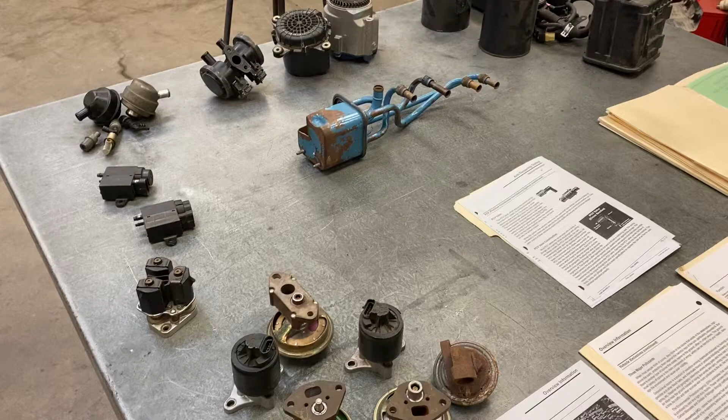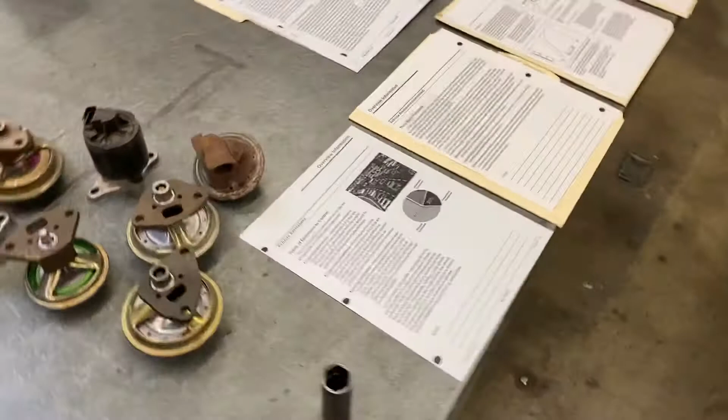Okay, we're going to take a look at emission control components and different systems that were used to control different pollutants coming out of the vehicle. So today we're just going to give you an overview of different components and how they work, brief description.

So we're going to take a look at some of the different emission components that came out. The first one, there was something called the Clean Air Act, way back in the 1960s, when the government started dictating to manufacturers that they have to lower emissions coming out of the vehicle. The first thing they focused on was where emissions are coming from on the vehicle.

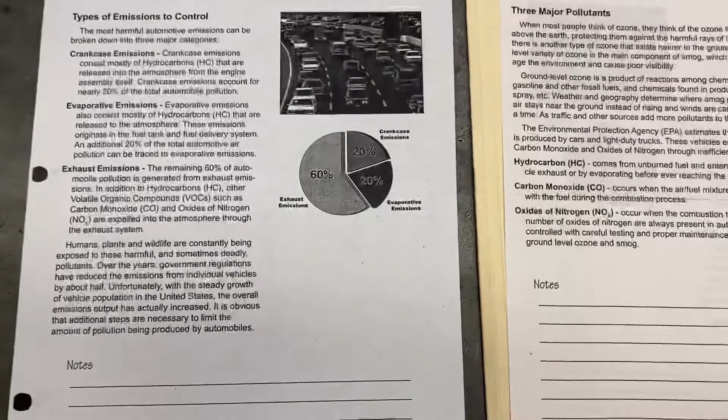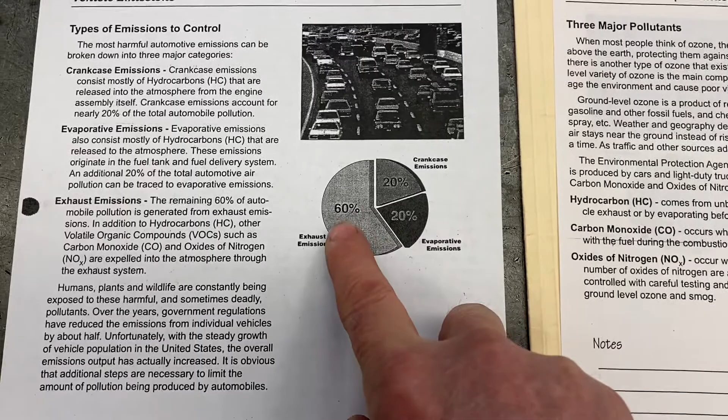This handout I'm going to give you has a pie chart on it. If you look at the different area percentages, exhaust emissions are about 60% of what comes out of the vehicle.

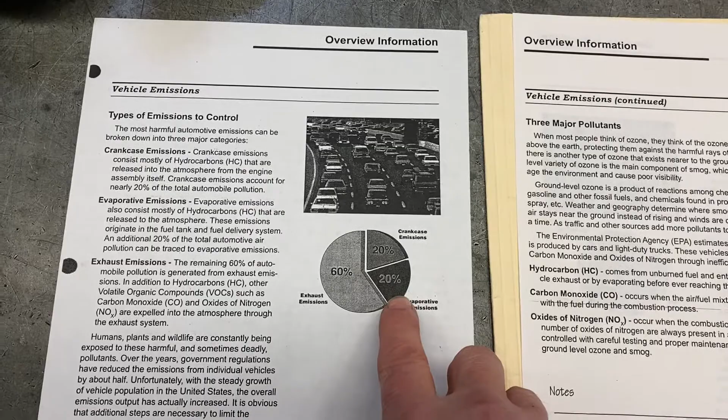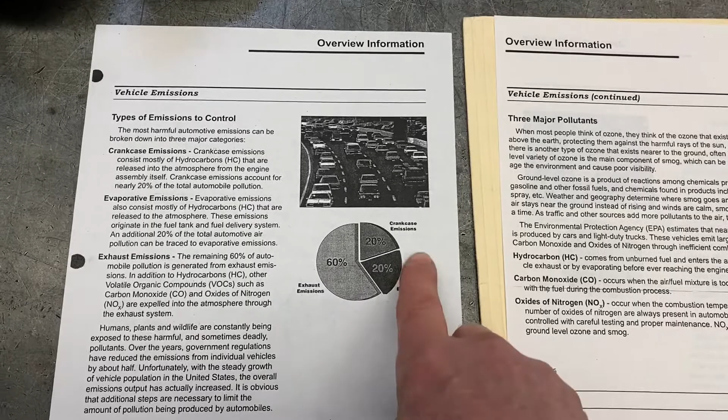Crankcase emissions, coming from the crankcase of the engine, which we'll talk about in a few minutes, are 20% of your emissions. Evaporative emissions are vapors from the gas tank and raw fuel vapors escaping the vehicle, not from the exhaust, but from around the vehicle when it's sitting overnight, sitting outside, or even when you're driving. So we have to deal with these three areas: exhaust, crankcase emissions, and evaporative emissions.

This handout gets into some detail about each one of these that we're going to be getting into.

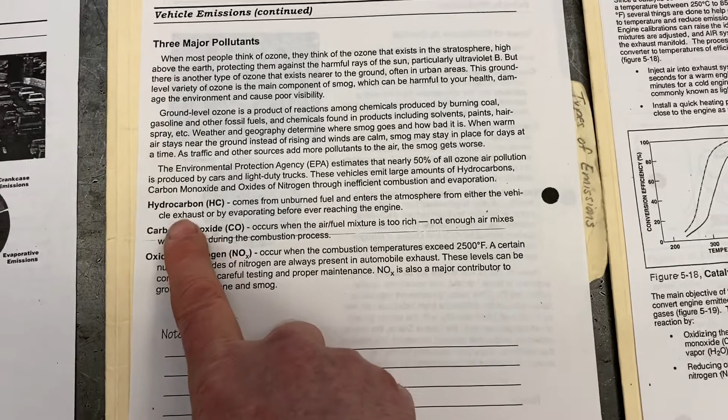Another thing I'd like you to understand are the three major pollutants coming out of the vehicle. We have HCs, an abbreviation for hydrocarbons, which is basically raw, unburned fuel. When you go to the gas station and smell that gasoline smell in the air, that is hydrocarbons - raw fuel vapors that you're smelling.

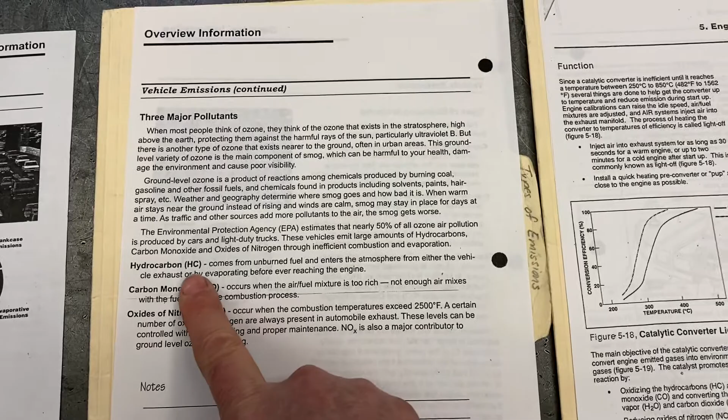Gas stations are actually supposed to have a recovery system on their nozzles to suck that vapor back into their equipment as it's putting gas in the cars. Some states don't have that, and some states, I don't think it works right, so you'll smell some vapors as you're filling your gas tank up.

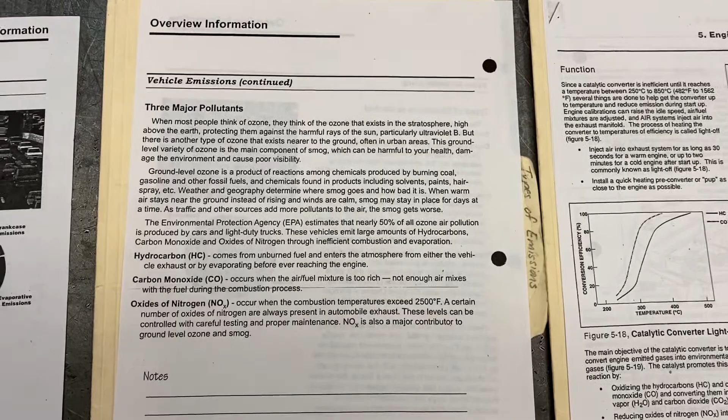Another pollutant that comes out of the vehicle is carbon monoxide, and I think you've heard of that before. That's a deadly, odorless, colorless gas that comes out of the vehicle that is bad for the environment.

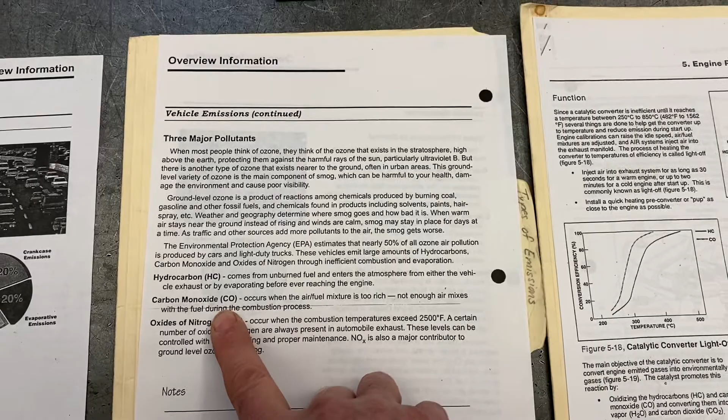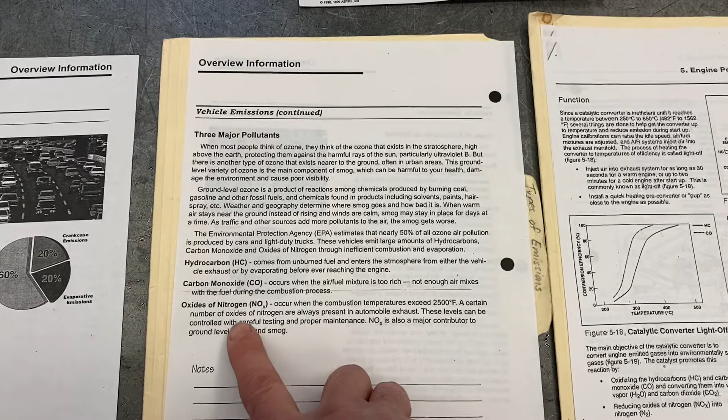The third pollutant is called oxides of nitrogen, abbreviated NOx. NOx is basically created when you try to reduce HC and CO by leaning out the mixture, reducing the amount of fuel that's burning. In a lot of cases, if you lean it out too much, you make the fuel-air mixture hotter, and once it gets over 2,500 degrees in the combustion chamber, you can start creating this new gas, oxides of nitrogen, which is also bad for the environment.

So these are the three things they're actually looking for when you go to motor vehicle inspection, when they're doing emissions testing.

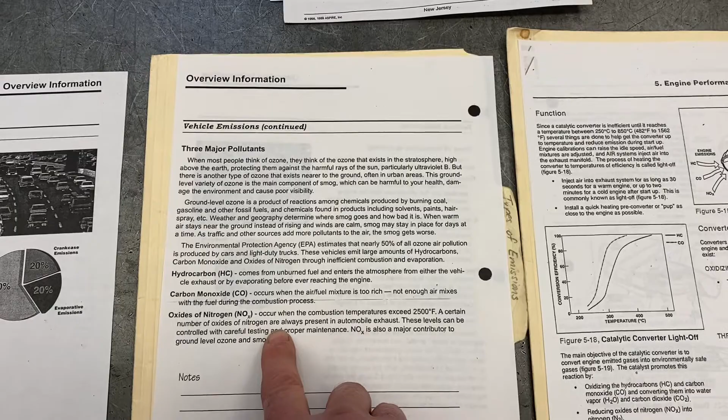So again, our components that we're going to look at are things that try to control these three and keep them from getting excessive. All right, so the first component that we're going to discuss is the PCV system.

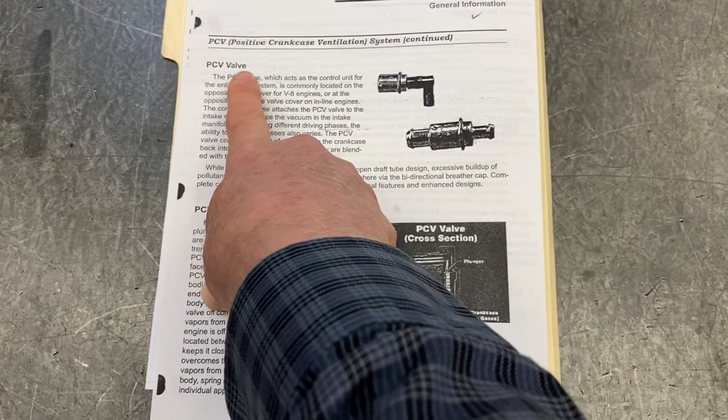Right here I have a handout that's going to talk about how it works, and we're going to give you some little details on this. PCV stands for positive crankcase ventilation. So basically what we're going to do, we're going to use a few components.

I have a few sitting on the table here. These are what they call PCV valves, these little things here. Each one basically has a different manufacturer, different design. This one here has two fittings on it.

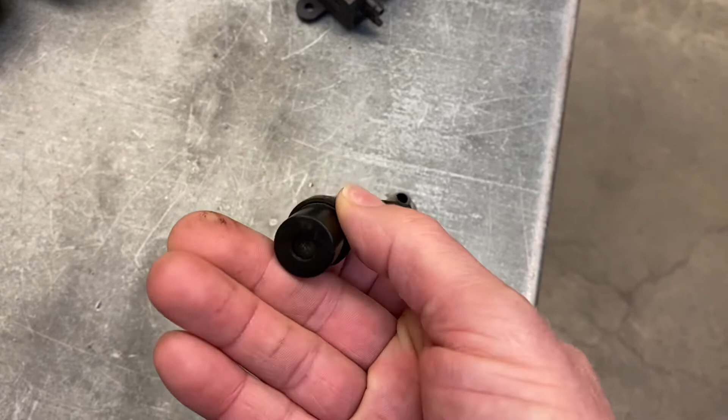When you go to the store or order it online, you have to specify what year, make, and model you need this component for, because they're different. There's probably about 50 different part numbers for these things, so you have to get the right one. But they all work the same way. It's basically how they hook up that you need to be aware of.

Some of them have two hoses going to them, some have a straight hose, some have an angled hose. Other than that, internally, this part works the same—it's just the hookup that's different. So what does it do? Very briefly, and we're going to get into some more detail.

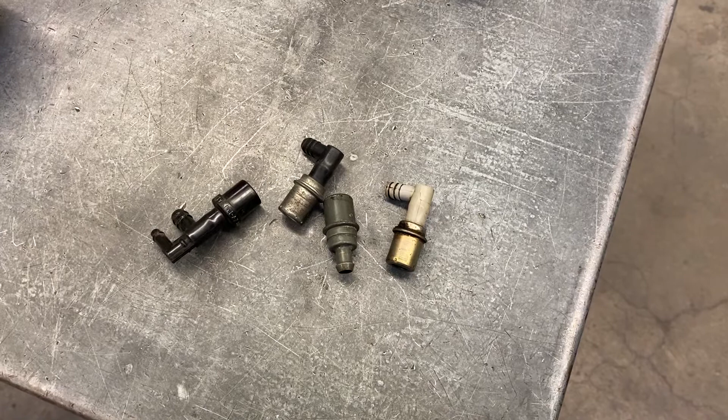When your engine is running, some of the combustion gases get past the rings in the engine, past the pistons. And if some of the combustion gets past the rings, where's it going to go? Well, below the rings where the pistons are is the crankcase—that's where your oil sits. And what happens is the oil area where the oil sits will actually build up pressure from the excess blow-by. They call it blow-by, which is combustion getting past the rings.

Now, if you remember way back when we did leak down tests, engines aren't 100% efficient. Some pressure gets past the rings—maybe 10 to 20%, sometimes as high as 40%, is still within acceptable limits. So if you have a newer car, you might have 5 to 10% blow-by gases getting by the rings. That's going to build pressure up in the crankcase.

So what we need to do is vent it somehow—we have to get that pressure out of the crankcase. If we don't do that, it's going to cause oil leaks all over the place. Any rubber seal you have on your crankshaft pulley, or your rear main seal where your flywheel is, you're going to have a leak coming out of there because the pressure is going to build up in the crankcase.

So what they did before 1963 is they just put a vent pipe off the side of the engine block that went down to the ground out the side of the engine, and that was called a draft tube. What that did was let the excess pressure out of that tube and kind of hit the ground. If you look at old pictures of highways—a lot of highways were concrete back then, not paved black, they were white—you'd see a line that looked like an oil slick down the highway where cars drove, because the oil would come out of that draft pipe and just get all over the place.

Now, in order to suck the vapors out of the crankcase, you need to let fresh air into your engine on the other side. So usually this might be mounted in one of the valve covers on a V8 or a V6 engine, and then the other valve cover might have something that looks like this. This is basically a fresh air intake side, so we're going to have fresh air. This is usually hooked to the air cleaner with a hose, so you get filtered air. This is going to allow filtered fresh air to go into one side of the engine, while this is sucking the vapors out of the other side of the engine into the intake manifold and reburning them.

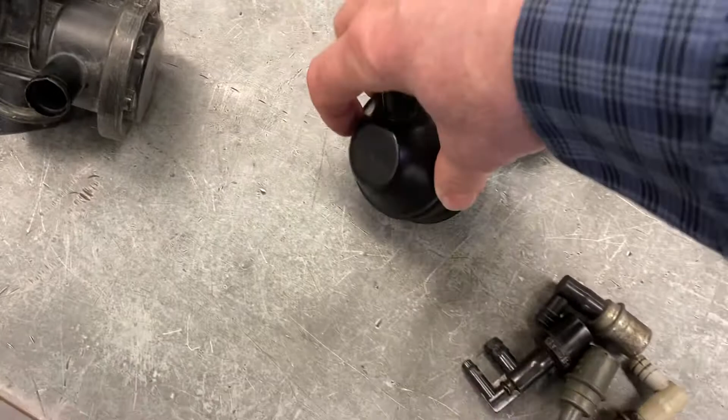So that's basically what a PCV system does. It positively sucks all the vapors out and reburns them again. That came out in 1963. That was when this system appeared, and they're still using it today on cars to ventilate the crankcase. There are some that don't have it, they do it a little differently, but I would say 80% of the cars have this PCV valve on the vehicle.

1963 was the beginning of the government being involved with different emission controls to try to lower some of the pollutants. Next thing we had in the 1960s also, there was a lot of concern about the exhaust gases leaving the engine and being not completely burned. So you would actually have some high emissions coming out the exhaust manifolds.

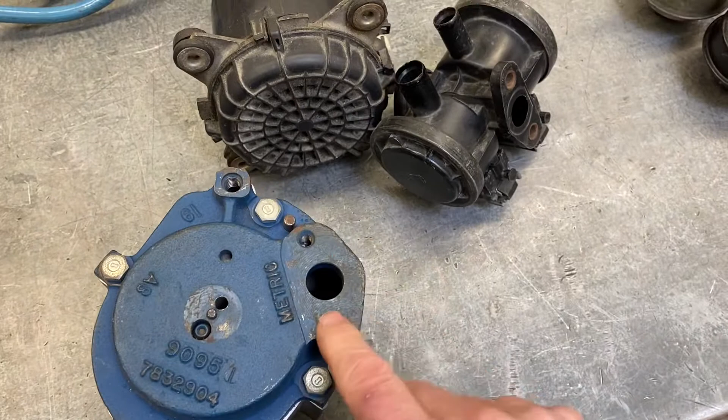And what they required on some vehicles back in the mid-60s was an air pump. This is an example of what an air pump looks like. This would have a pulley on it, and this pulley would spin this like an alternator, basically spins the inside of this. And this is actually just a pump. This pumps air, and they would have a tube coming out of here with a fitting that would go back into your exhaust manifolds. There would be pipes that went into your manifold.

And what that would do is pump fresh air into your exhaust manifold, and the purpose of that was to continue the burning process when the exhaust left the engine, because when a car is running rich and there's no more oxygen left, you're going to basically run raw fuel and different gases out the exhaust manifold. What they found is if they pump air into that, you can continue the burning process further, and that will cause what comes out of the tailpipe to be a lower level of emissions. It'll continue the burning process as it travels through your exhaust system and cause it to run cleaner. So back in the 60s, they had a belt-driven air pump.

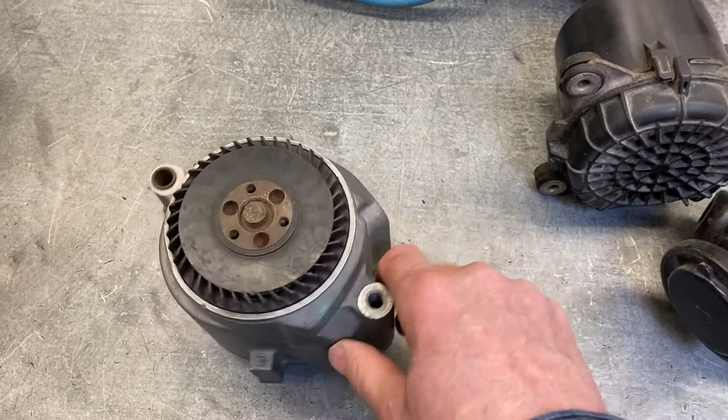Most vehicles, if sold in certain parts of the country like California or the Northeast, might require an air pump. But if the same car was shipped to the middle of the country, like Nebraska, where they didn't have emission concerns, it might be the same engine without an air pump. So depending on where the car or truck was originally shipped determines what type of emission controls were put on that vehicle.

They used mechanical, belt-driven air pumps for a long time. Then they switched to electric air pumps. This is an example of an electric air pump.

The difference now is instead of taking power away from your engine—because a lot of people back in the 60s looked at this as a device that robbed horsepower, and the first thing they'd do is cut the belt off. This had its own separate belt just for the air pump, not the belt for the alternator or water pump. They'd cut that off because it could rob like 10 horsepower, and they wanted all the horsepower they could get. Actually, some bigger engines, like big block V8s, might have two air pumps, one on each side of the engine.

One pumping air into one side of the exhaust and the other pumping into the other side. I've seen big trucks with big engines having two air pumps to reduce emissions. The electric air pump is good because it takes very little power from the engine to run. Basically it'll run when you first start up your car, when it's cold, because we have to warm it up quick and get the emissions low.

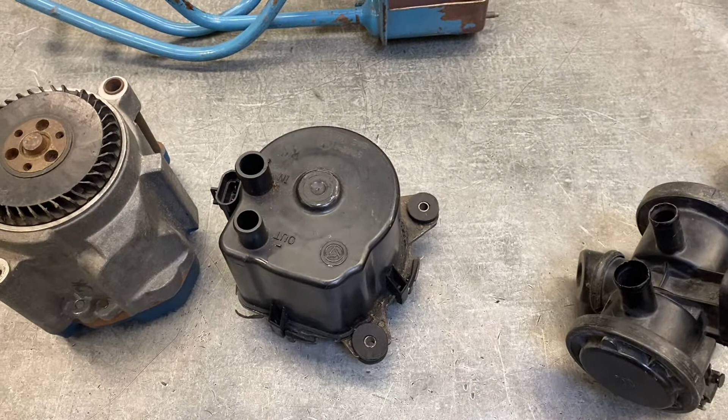It only needs it when it's cold, and it's there for two purposes: lower emissions, and also to warm up your catalytic converter. By pumping air into the exhaust, you're putting oxygen into the fire, heating up the exhaust quicker, and getting the catalytic converter to start working sooner. We'll talk about the catalytic converter in a minute.

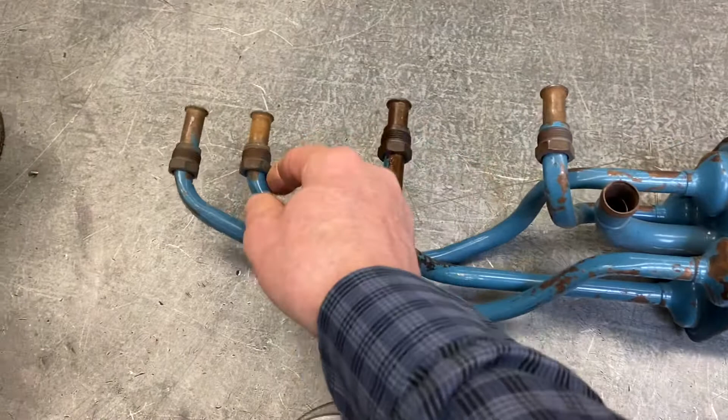I grabbed this—I've had it for years and years, this funky looking thing. This is what I used to call the poor man's air pump. It basically wasn't a pump at all, just this chamber and these pipes which screw into the exhaust manifold. This one's off of 4 cylinders, so you'd have 4 pipes going in, each coming out where each cylinder exits the engine. It had little check valves inside.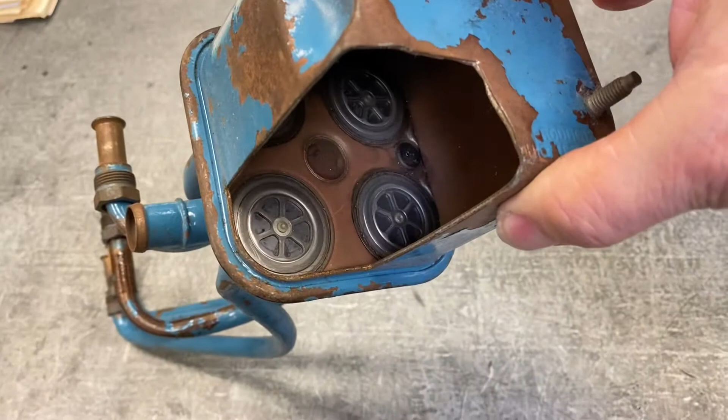As the engine ran, these check valves would let fresh air in through this box, then suck it into the exhaust manifold. So instead of using a pump that pushed air in, it would actually suck air in by having the exhaust pass by the ends of these tubes. This was used in the 1980s, and I think the late 70s too. These would rust away and leak, so you'd have to replace them.

This came out in the 1960s to try to lower emissions. They're still using air pumps today, so we still have cars with air pumps trying to reduce emissions, especially in California and other states.

Then starting in the 1970s, the early 70s, '71, we became concerned about emissions coming out of the gas tank. If you open up a tank of gas, you'll see vapors coming out, or you can smell it when you take your gas cap off. So before 1971, we used a vented gas cap—the cap itself had a hole in it to let excess pressure in the gas tank vent into the air.

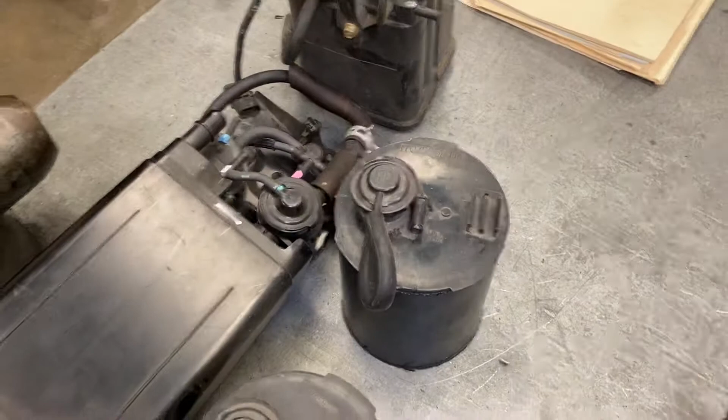Now that is pure hydrocarbons—basically like leaving the lid off your gas tank and letting the vapors come out into the air, and before 1971 that's how they did it. The gas tank has to be able to breathe, because when it gets hot outside, pressure builds up in your tank. You can actually hear it when you take the gas cap off while filling—that's the pressure releasing out of the tank.

So that was not good, because if you think about it, if we have a hole in the gas cap, that's going to basically let raw vapors, which is hydrocarbons, into the air. So the government required, starting in the 70s, a way to capture those vapors. So what we used is an Evap system. Evap is evaporative emissions - evaporative means vapors from the fuel system - we have to capture them somehow so we don't let them out in the air.

So the first, earliest ones were these charcoal canisters. Somewhere on your vehicle, usually under the hood, you'll find this canister, and it's actually filled with charcoal, like little pieces of charcoal with a filter on the bottom. And what charcoal has the ability to do is absorb vapors from the fuel system and collect them inside here.

Now, what we did was, when the car was parked and you weren't driving anymore, it would actually just collect all the excess pressure and vapors and store it inside this container. And then one of these hoses on here went to your gas tank. Actually, it's marked so you can see - this one says fuel tank, this one says carburetor bowl, which we'll talk about in a minute. And this had something to do with controlling it. But basically, this went to your gas tank with a hose, and then this one went back to usually the intake manifold, or in this case, it went back to the bottom of the carburetor.

And what happened when you start the car up in the morning, all the vapors that are collected in here would suck out through the hose, which was hooked to your intake manifold. You'd have a lot of vacuum there, and it would suck all the vapors out and reburn them. So instead of sending all those vapors into the air, we would put them into this canister temporarily and then reburn them to save the environment, basically - we're basically not putting it in the air.

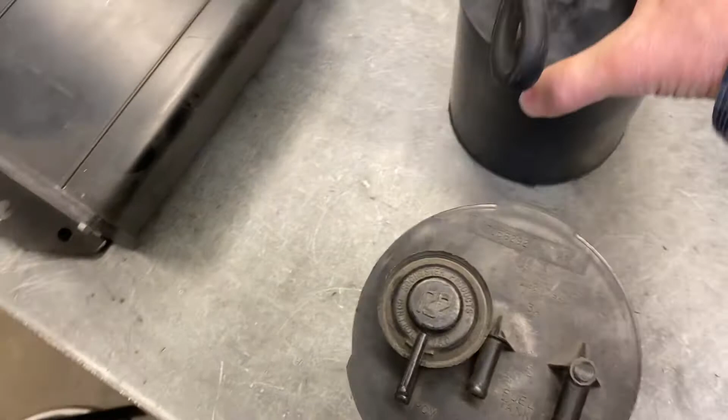So over the years, it evolved into something that looks like this. This is another design, basically looks similar. So through 1996, we had this type of Evap system that basically just collected vapors and reburned them.

The only problem with this system is if something went wrong with this - let's say the hose fell off or got a crack in it, it wasn't working anymore. I've seen these crack when people have accidents, they break these things. These are usually under the hood somewhere, so if you hit something, you might damage this. There was no indication to the driver that there was a problem with your Evap system. Basically, the only thing you might notice is if you park your car in the garage and close the door, and you come out in the morning, get into your car and you smell in the garage like raw fuel - that is because your Evap system's not working properly.

It's basically not collecting the vapors, it's letting it into the air, and you can actually smell it. It's like you poured gasoline on the floor and you can smell a lot of raw fuel vapors. So that would be the only indication that maybe there was something wrong, or maybe it's leaking fuel - there might be fuel dripping out of the bottom of it if something's wrong with it.

All right, so 1996 was a big year. In 1996, they changed a lot of the requirements of the manufacturers. It's called OBD2 - Onboard Diagnostics Generation 2.

Part of that change was to have what they call the enhanced Evap system. This is what the charcoal canister looks like now. It's got this funky looking valve thing on it, and some of them are square shaped, some are rectangular shaped. Here's one off a Toyota - looks a little different. Basically, it still stores the vapors inside here, like these older ones.

But the difference is this monitors itself. This actually can tell if it's working properly by testing it as you're driving, to see if there's any cracks or leaks or anything inside the system. If there's any leaks within 0.020 - that's 20 thousandths - like a little pinhole somewhere in one of these pipes, it's going to set a code. It's so sensitive that if you leave your gas cap loose, that's a leak as far as it's concerned.

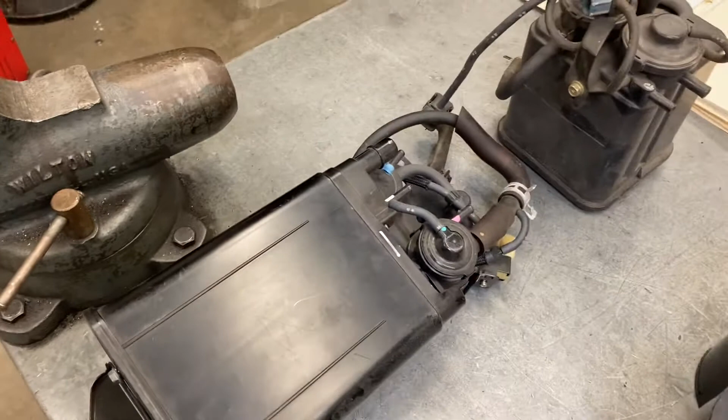It'll actually set a code for a loose gas cap, which is an indication that you have an Evap leak. This is what they call the enhanced Evap system. We're going to get into a little about how to test this. Sometimes it can be really hard to pinpoint where the leak is because you might have a pinhole somewhere. So the easiest way to do it, I found, is to use smoke.

You're actually going to seal up all the valves and everything. You have to go through a procedure, and then pump smoke into a special fitting which they have on the vehicle. I can show you what that looks like. It has a green cap on it, and that cap allows you to hook your smoke machine and testing equipment up to your vehicle. You have to use a scanner because you actually have to close the valves at the right time, pump smoke in, and then basically you're just visually looking around for where the smoke is coming out, and that would tell you where your leak is.

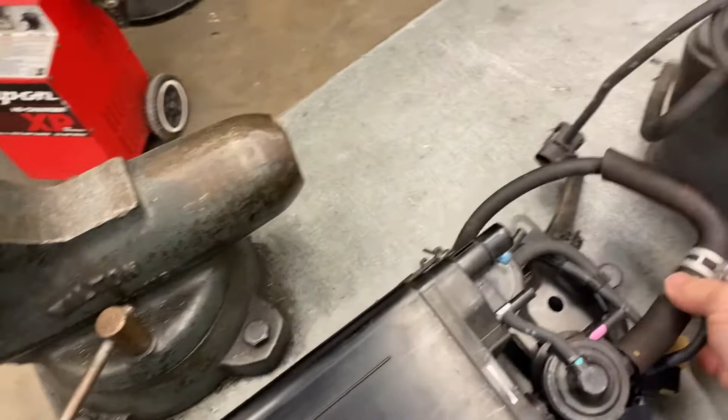Sometimes these get cracks in them. I've seen problems with the hoses. I've seen problems with the solenoids that activate the Evap system.

This came out in the 70s. These older ones are 71. These are 96. So again, these are for evaporative emissions.

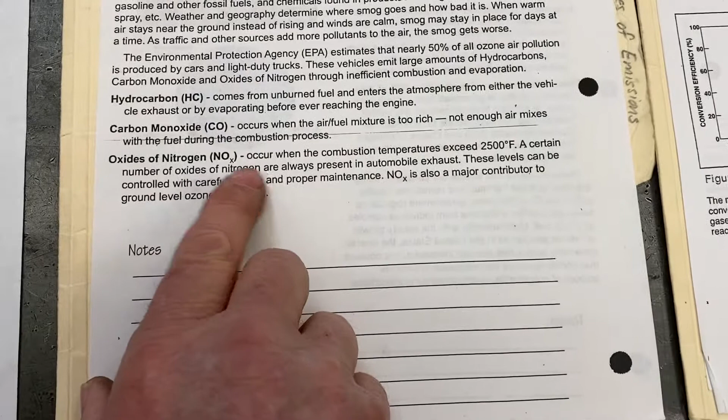1973 was another big year because we needed to control another emission. So what we had back in 1973, this emission here, which is oxides of nitrogen, they found that this was being created because they were trying to reduce these two, HC and CO.

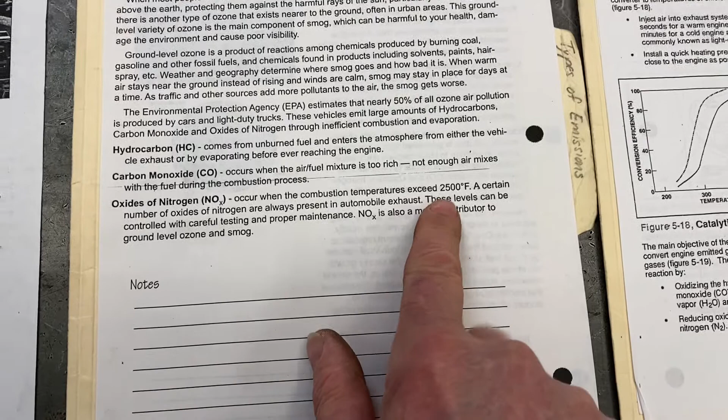By leaning out the mixture so much in the 70s, they actually created a lot of heat in the combustion chamber, which was causing temperatures to exceed 2,500 degrees. Once you get over 2,500 degrees in the combustion chamber, you're actually going to start combining the nitrogen that's in the air. Air is made up of about 21% oxygen and about 78% nitrogen. You're actually going to create this new pollutant called oxides of nitrogen when the heat gets up to 2,500 degrees, and that's going to cause a pollutant that actually creates acid rain, and it also creates smog.

So if you ever go to Los Angeles when they have a lot of smog in the air, that's from oxides of nitrogen escaping into the air. That can cause smog, and acid rain is when it rains through that smog, it actually creates an acidy rain.

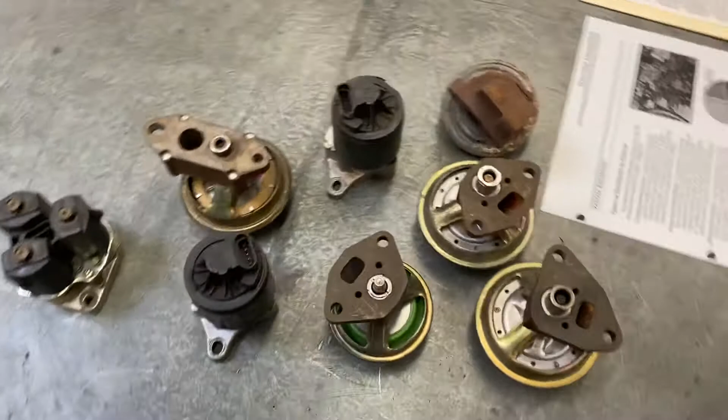So what they came up with was a way to reduce the temperatures of the combustion chamber down below 2,500 degrees. The way they did that was this component right here, called an EGR valve. EGR stands for exhaust gas recirculation.

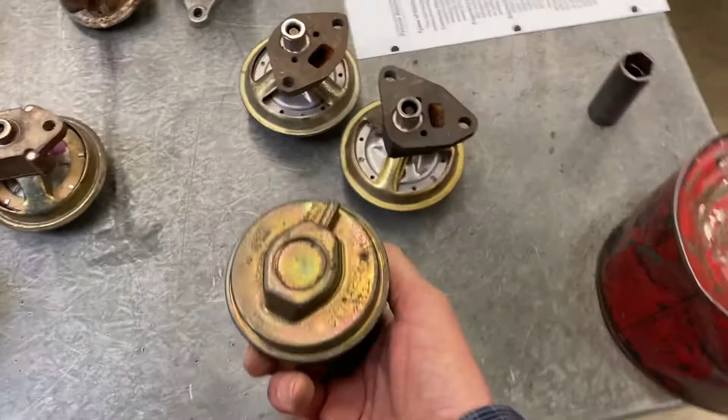Now the older ones, this is from the 1970s, this EGR valve is pretty old. These were vacuum controlled. They had a little vacuum hose on here that went to your intake manifold. Now, we have to control the EGR valve only when we're not idling. You don't want the EGR valve to have vacuum going to it when it's idling, and I'll explain why in a minute. So we need to route the hose to something that doesn't have vacuum until we're off idle.

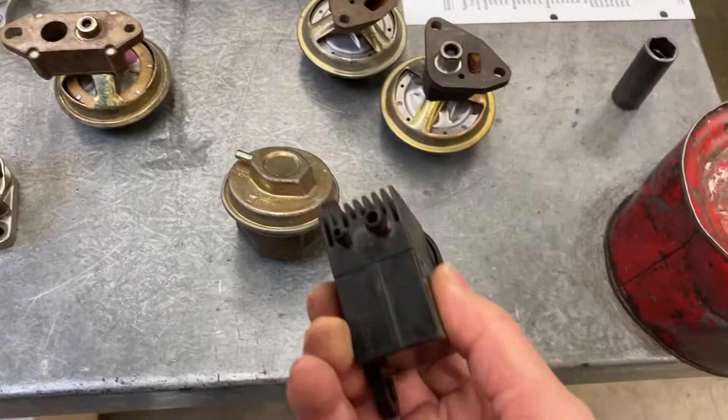Now, in some cases, they actually use an electronic solenoid. This is what we call an EGR solenoid. This would actually control the vacuum going through it. So at idle, it wouldn't let any vacuum through. Even though you had vacuum going to one side, it wouldn't let any vacuum come out of the other side.

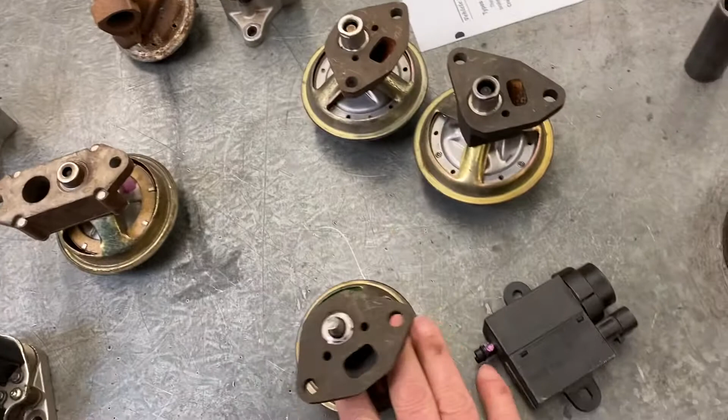Until you started driving the vehicle, and then the computer would start pulsing this solenoid on and off, letting some vacuum go through. Once the vacuum got through, it would go to this valve and to this fitting, and it actually would do this to it. If you watch the end of this, see how it opens up when I do that? I'm actually pushing down on this part, which is the diaphragm. So when you put vacuum on the EGR valve, it's going to suck the thing open.

Now what this does when it opens up is it takes some of the exhaust in your exhaust gases and recirculates them into your intake manifold. So let's think about that for a second. We're going to take exhaust gases and recirculate that into the intake manifold. Now what will that do? Well, by putting exhaust into the intake, regulating a little exhaust in there, because exhaust doesn't have much oxygen in it, and the way heat happens in a fire is you have to add oxygen. If you want to lower the temperature, you have to take away oxygen.

So what this valve did was it actually removed oxygen from the intake manifold before it got into your combustion chamber, and it would lower the temperature of the combustion chamber, which would reduce NOx, because NOx is only created when you have over 2,500 degrees.

So the older EGR valves were vacuum controlled. Basically, it either opened or closed, or it could pulse a little here and there to regulate how much exhaust gases go in.

Problem is, if you have EGR at idle, let's say I open this valve up at idle, the engine's running at such a low speed it'll almost stall, because the engine doesn't like exhaust gases going in—it's diluting the oxygen. Engines like oxygen, so that's why we never put EGR on when we're idling. This solenoid will prevent that from happening.

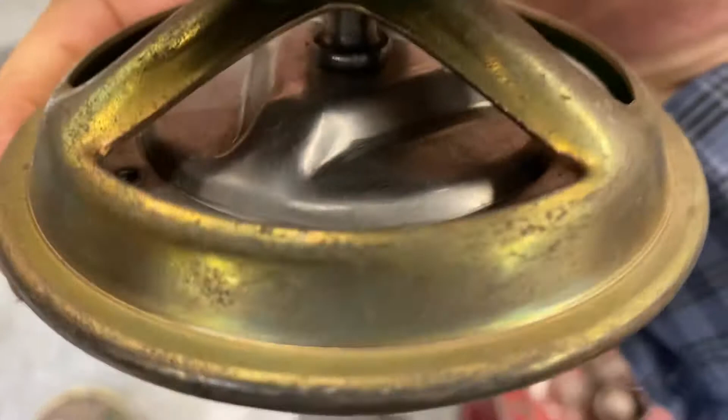These here are—one's a negative back pressure. If you look at the part number, there's an N after that 32, that means negative. You can also tell by looking at the diaphragm. If you look inside that silver thing, see how it has a bump in the middle? This one here is flat—no bump. This is just a ported vacuum EGR valve.

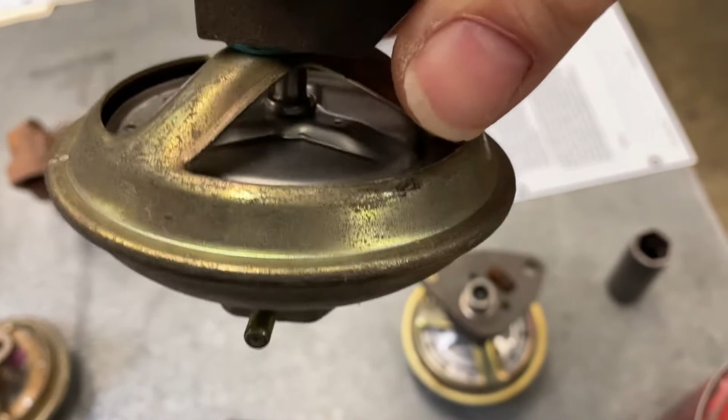This one here also has a bump, but if you compare the height of that bump to the height of this bump, this one's taller. This is a negative, and this is what we call a positive back pressure EGR valve. So again, different designs for different year, make, model, and engines. Make sure you get the right one—they have different part numbers for different year, make, and model.

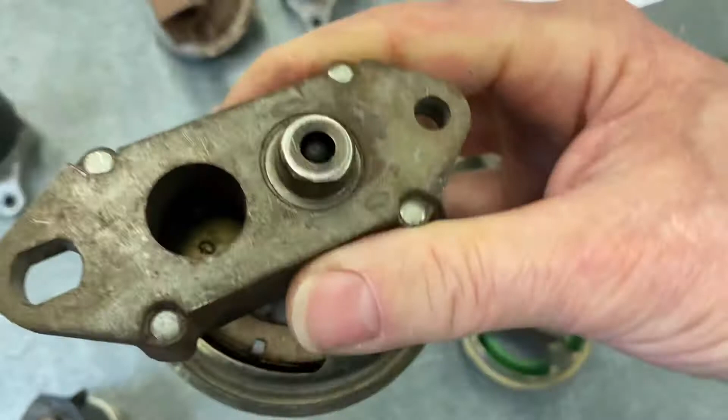Here's another EGR valve, again vacuum controlled. It's got the flat diaphragm—this is a ported vacuum EGR valve. And here's another one, just a different design, same kind of setup. Can't see the diaphragm on it, but this would pump exhaust gases into your intake, which would reduce the combustion temperatures.

Now, they got kind of fancy with EGR valves. Here's a really funky one—I remember in the 80s this thing came out. This is a 3 solenoid EGR valve. It's not vacuum controlled anymore. They didn't like vacuum, they were trying to get away from it, so they went to a fully electronic EGR valve.

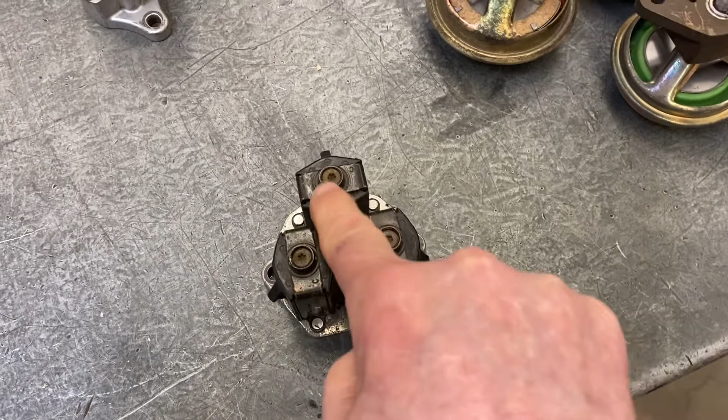So what they decided to do is set up 3 solenoids that can open and close when commanded. Each one has a porthole underneath—one has a small hole, one has a medium hole, and one has a larger hole. And we can energize these in different sequences.

So if we want a little amount of exhaust gas recirculation, we'll just open up this one—we'll get like 20%. If we open up these two together, let's say this one does 30 and this one does 20, and we want just 30, we'll close this one and open this one up. So this is gonna be 30% EGR.

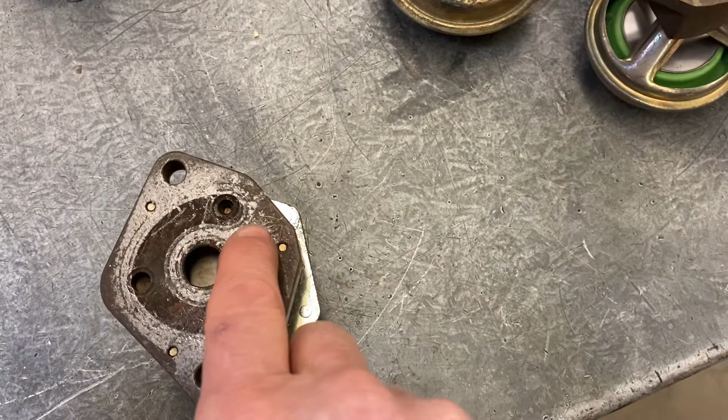Let's say we want 50%—what we can do is open these two together, and that's gonna create 50%. If we want 70%, we can do this one and this one, which would be 50 plus 20, that's 70%. Or let's say we want just 50%, we can just do this one. Or if we want 100%, we'll open all three up, so we can get 100% EGR flow.

So the computer could do different combinations of flow by energizing different solenoids in different sequences, which will cause a different amount of flow rate through this EGR valve. Okay, so this is what we had for a while.

Most of the newer cars now have something that looks like this—this is a solenoid-controlled EGR valve that has no limitations. It can open and close. Let's find one here that actually opens. So basically what we have here is the opening. The solenoid, which is this part of the EGR valve, has infinite positions.

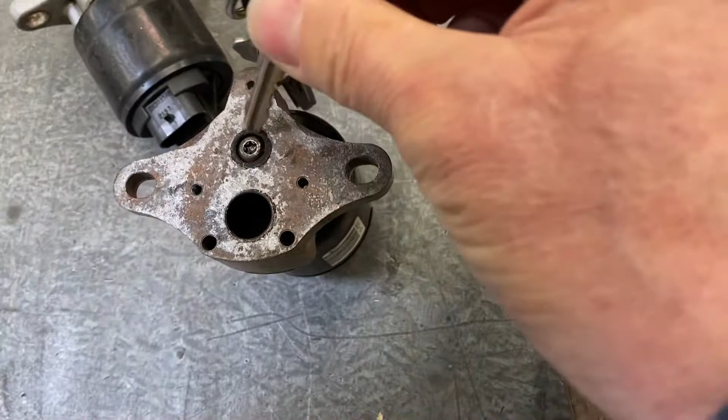So if I take something and stick it inside here, you can see how it kind of works. If I push down on this middle part right here, you can see that that opens and closes. Now what the computer can do with this one is it can do like 10%.

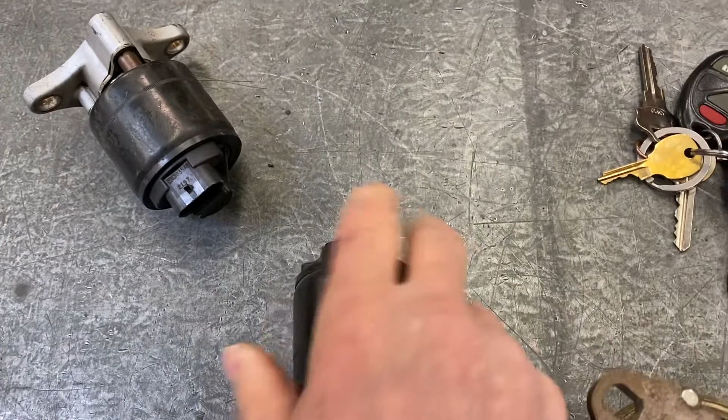If it puts 10% on and 90% off, it'll open the valve just 10%. If it wants 50%, it'll pulse it 50% on and 50% off, opening it halfway. If it wants more, it can pulse it 70% on, 30% off, opening it up a little more. If it wants a lot of exhaust recirculation, it can do 100% on and 0% off, and it's wide open.

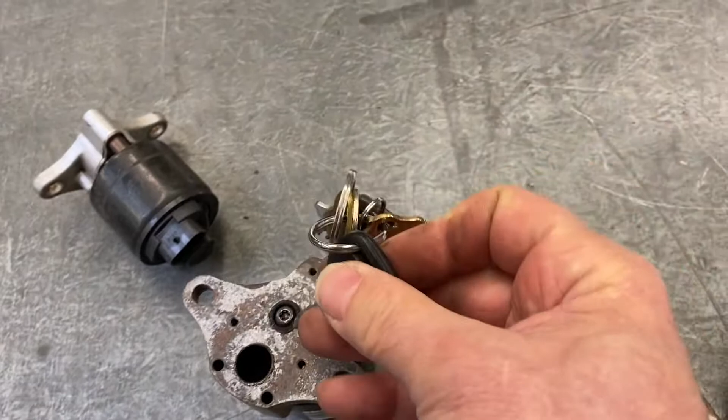So this little valve that can go anywhere from 0 to 100% is controlled by the computer to very accurately put the amount of exhaust into the intake that we need for the driving conditions you're in. This is controlled by this little plunger, controlled by the computer.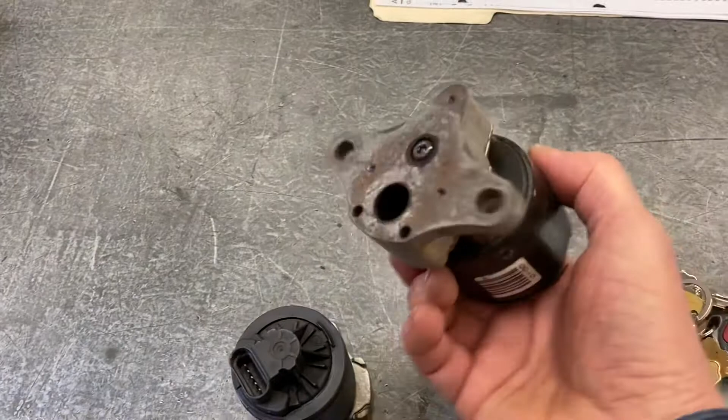This is the newer type of EGR valve that doesn't have any limitations to positions. They can basically do whatever they want as far as controlling emissions. So we're still using these on newer vehicles to control NOx, oxides of nitrogen.

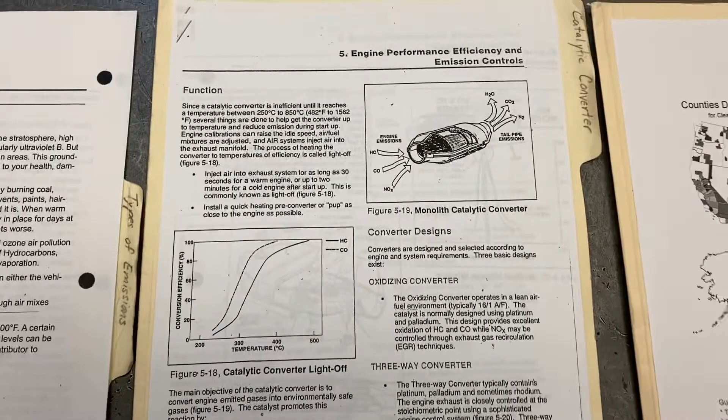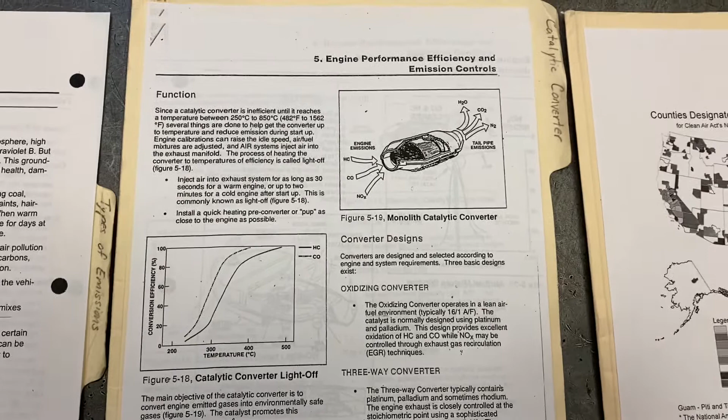This was another big thing that happened in the 1970s. Here's some information in your module about catalytic converters. Catalytic converters were put into the exhaust system starting in the mid-70s to control NOx, HC, and CO, all three emissions.

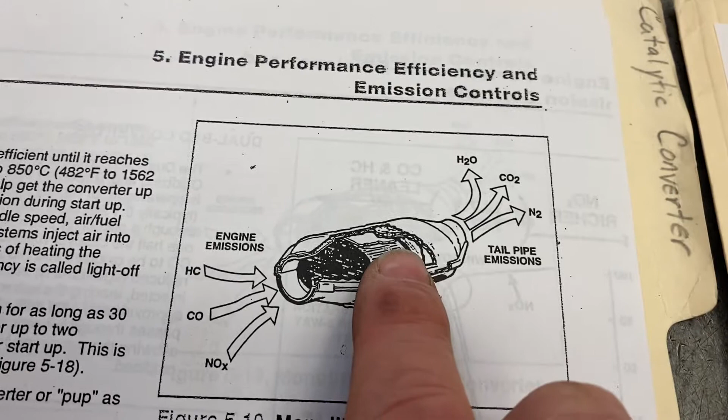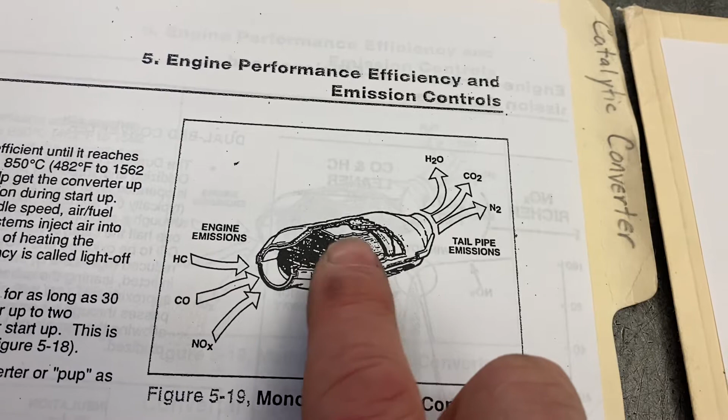You can see what we have going on here: coming in is HC, CO, and NOx. Older ones had beads coated with different materials - platinum, palladium, rhodium. These are rare elements. That's why people like stealing catalytic converters - if you get one, they'll give you money for it because there are elements in there that can be melted out and taken out, and they're worth money. Platinum's expensive, palladium and rhodium are expensive. The idea is these rare, expensive elements react to the hot exhaust entering the catalytic converter.

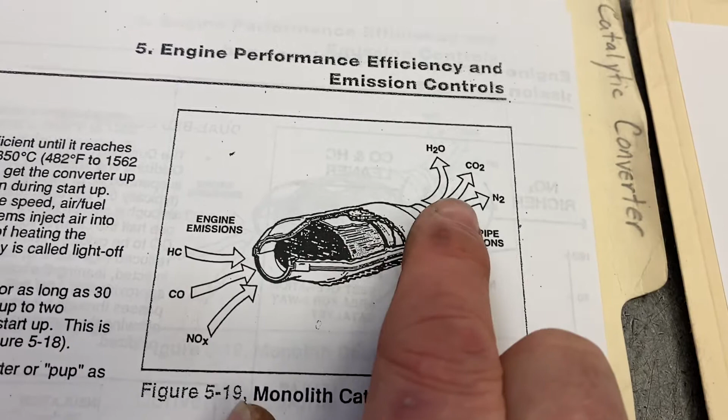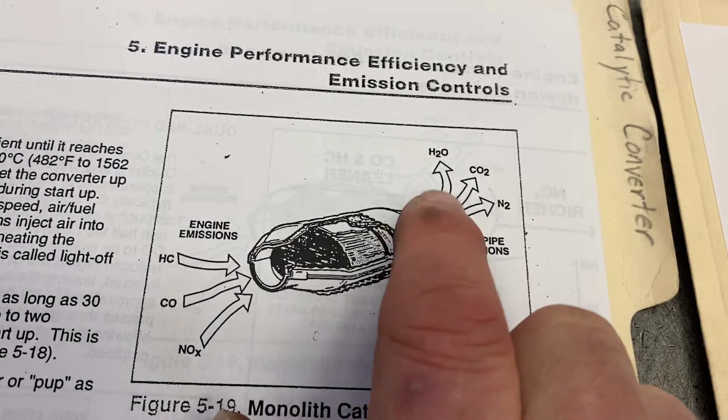It has a reaction, and what comes out the other end is like a miracle. We go in with bad gases - HC, CO, and NOx - and we come out with water vapor, H2O, which is why sometimes you see water dripping out of the tailpipe. That's normal. We also have CO2, carbon dioxide, which isn't a poisonous gas, but isn't good for our environment because it can cause greenhouse effect. Then we have N2, nitrogen. Nitrogen is good - plants like nitrogen, they breathe it in.

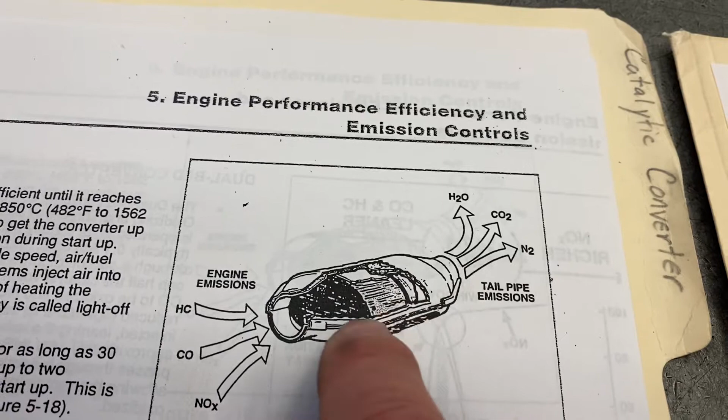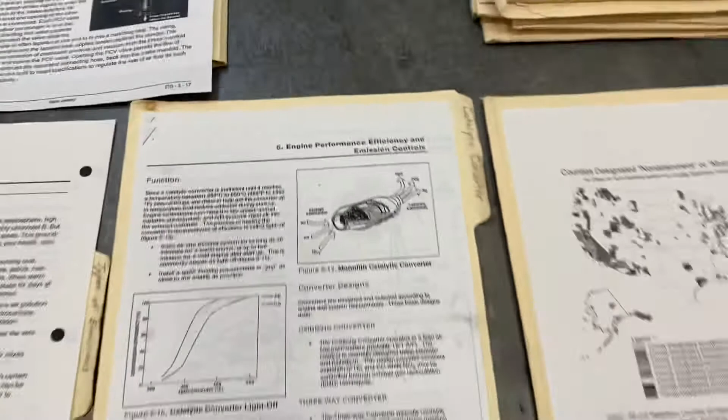So catalytic converters are like a miracle device that can drastically change your emissions as it reacts to these elements inside and comes out as a cleaner gas. Starting in the 70s, we started using catalytic converters.

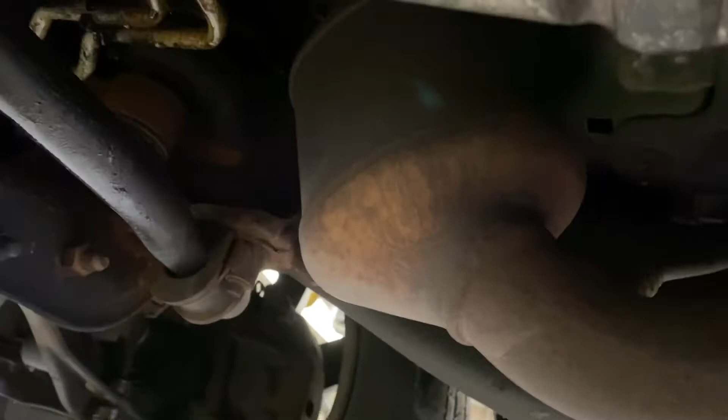I just wanted to go underneath the vehicle real quick and show you these. Let me put my truck up in the air so we can get under there. Depending on what engine you have, you might have more than one catalytic converter. Look right up here - see this piece? This is your catalytic converter coming off the engine, with a pipe coming out. On the other side, there's another catalytic converter. So you have two, one on each side of the engine.

There's actually a component screwed into the back of the catalytic converter with a wire coming out - that's an oxygen sensor. It's monitoring the catalytic converter to see if it's working properly. There's an oxygen sensor up front too, you can't really see it, but it's up there somewhere.

Let's go over to another vehicle and look at what its catalytic converter looks like. This is off one of our donated cars. Here's the exhaust system - this one has pretty crazy exhaust. You got a Y pipe here that comes from each side of the engine, goes into one pipe. This is a catalytic converter here.

They got a second catalytic converter, and it looks like they got a third catalytic converter. Each of these are reducing the emissions as it travels through, lowering it as it comes through. By the time it gets back here, there's your muffler and...

Tailpipe. Again, catalytic converters came out in the 1970s. It's illegal to take them off. They do take some power away from the engine. You can buy high efficiency flow catalytic converters, which still work but flow better - so there are options you can buy.

I just wanted to show you these. These are still used all the way to today. So that's basically an overview of our emission control devices.